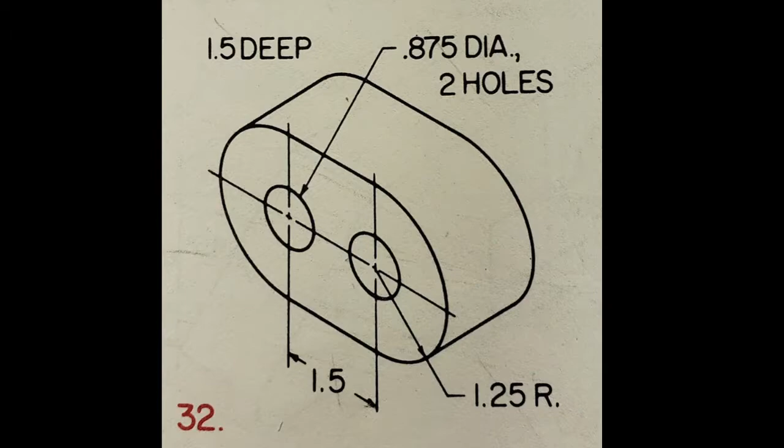Working on number 30. What are we looking at? 32? 32 it is. You guys know this one, the round one with the two circles in the side. Pretty straightforward. It's going to look a little different, three view. So we're doing three view this time. All right, let's get started.

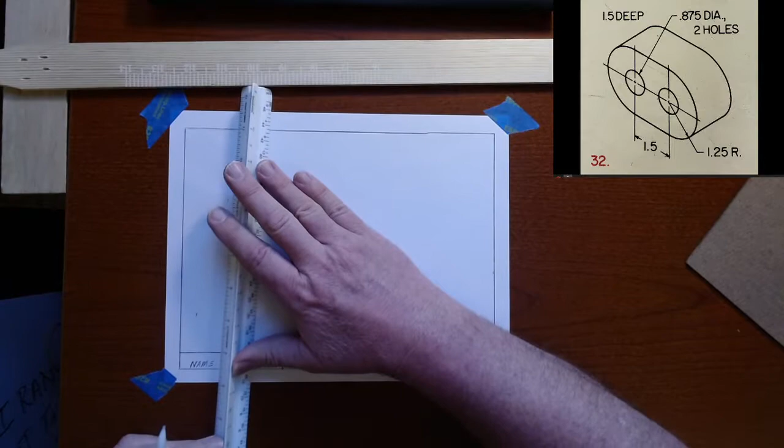As you can see, I have my border, my nameplate, my Lucky L, and we're ready to start drafting. The Lucky L is always drawn the same way. I don't have a Lucky L. Let me stick that on real quick. So I'm going to go up a half inch. Up a half inch and over a half inch. So up for my nameplate, over for my border.

And again, these are going to be super light lines because they are construction lines used to build the drawing and will probably end up getting erased. Well, a good amount of them will. So there is my Lucky L. All right, so what I need to do is I need to put those two crosses that are in the middle of the circles first.

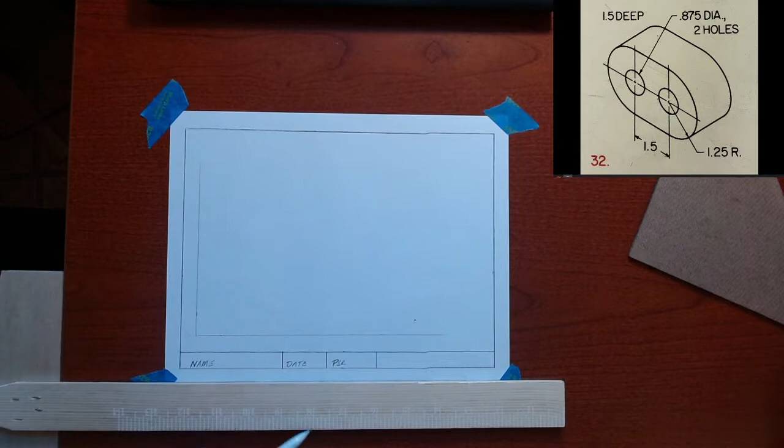And I know that they are 1 1/4 over and 1 1/2 over. And I know that from when I drew this 3D. I stared at this a long time to figure out those measurements. So I have two vertical lines. Those are the uprights in the cross.

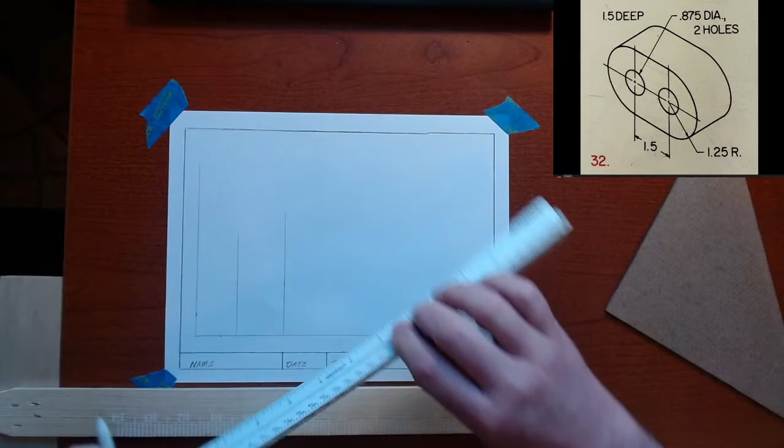And then I need to come from the bottom because it says it has a 1 1/4 radius. We're going to come up 1 1/4, put a little mark. And that's going to draw us the horizontal line there that is going to do the other part of the cross.

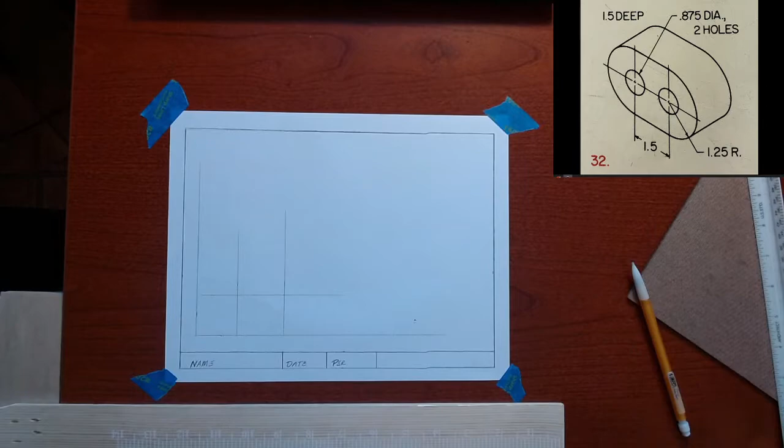So what I'm doing right now is I'm digging out my circle template. I know you don't have one. Use your compass. And again, don't use the scale that's on the compass. Those are never accurate. They never work. So what I do is I take my scale and put the stabby part at 0, and then just adjust it to 1 1/4 using my scale. That's one way to do it.

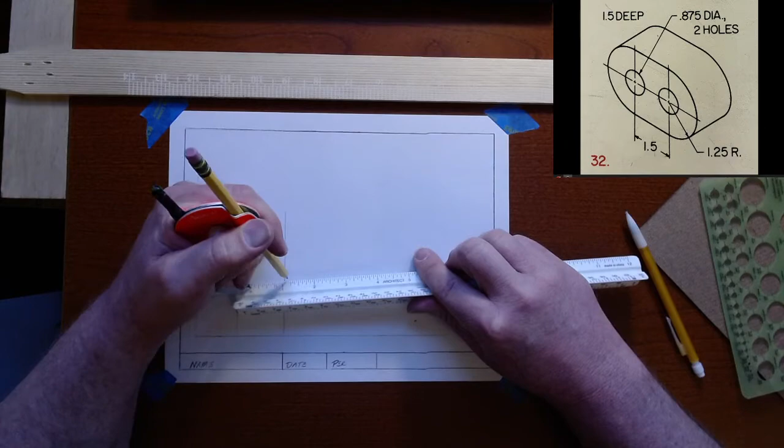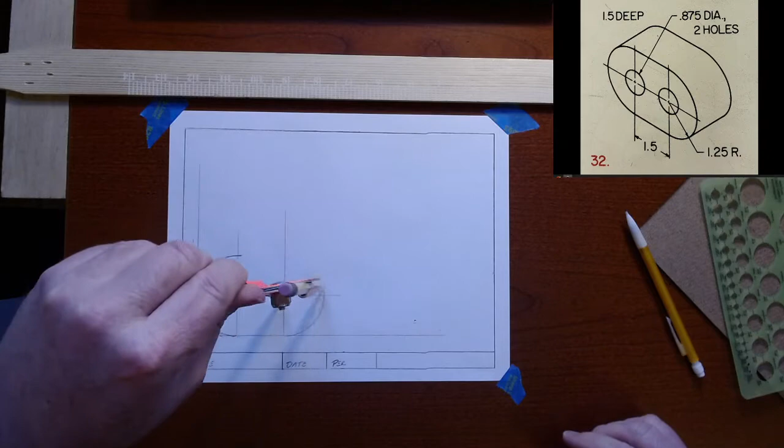The other thing I can do is I can simply take my compass and put the stabby part on the first cross and make sure when I do this that my compass touches both the bottom of the Lucky L and the left side. And again, I'm going to come in from the center of each cross. I'm going to draw those two radiuses on the end like such.

That was pretty easy. And then I'm going to come in and connect them with a line that touches the very top of those circles. A line there, and the same thing at the bottom. We're just darkening up the part of the Lucky L there, and that gives us our outside shape. I can now come in and erase this part of the Lucky L down here because we don't need it, right? That's not needed anymore.

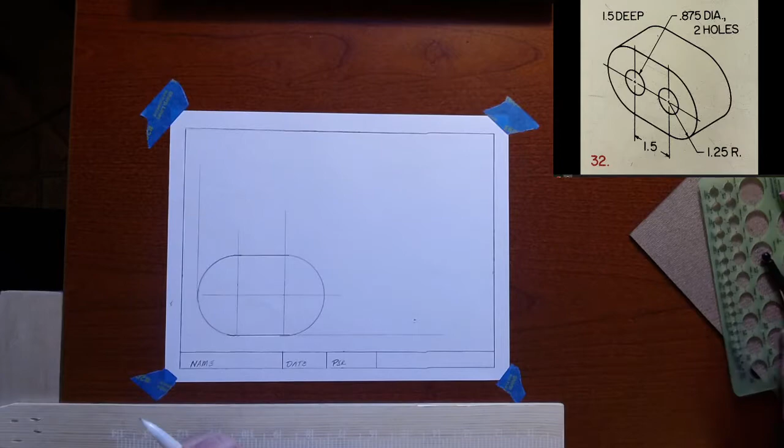Second thing we're going to do is we're going to throw a couple circles in. Again, you could use a compass and set it to 0.875, which is 7/8. And so if you're going to use a compass, half of 7/8 is 7/16. So you can take a compass, set it to 7/16 to make those circles, or you can cheat like I'm doing and you can use a circle template.

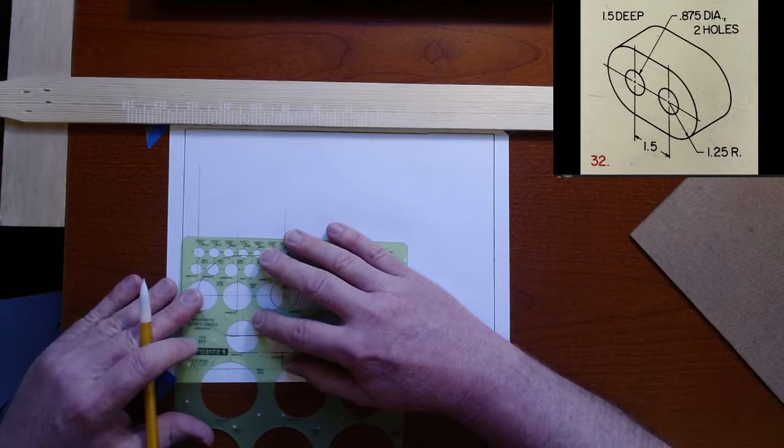I just happen to have one here, and so to make the video a little quicker, I'm going to use it. Either one is perfectly acceptable. The circle template is easier because you're just tracing, and number two, you don't have to adjust it, and they usually work out pretty well. So hey, there's my front view. Done, finished, complete.

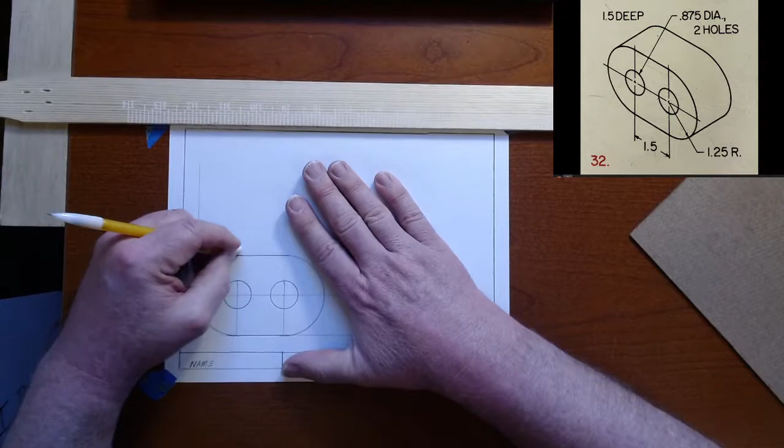I'm going to go ahead and erase these crosses that are in here. Don't need to be there. So I can erase them. I tend to leave the cross inside the circle. And the reason I do that is so people can kind of figure out how to draw this or how to make this. So if somebody was going to build this out of wood or metal or plastic or something like that, it would be nice to know the whole thing is referenced off those center crosses.

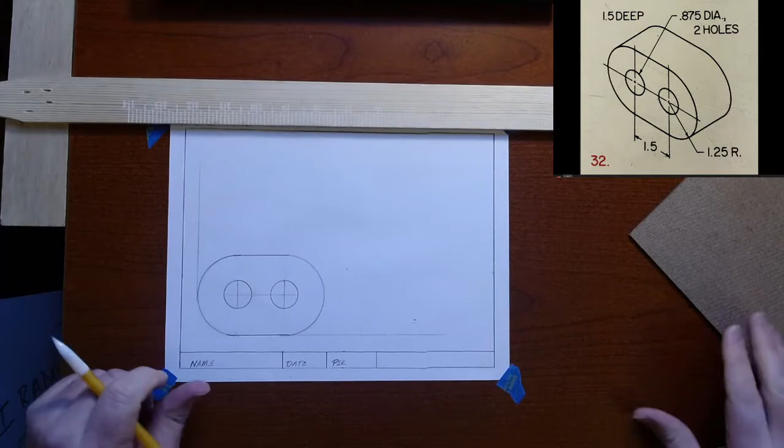So if you leave them there, it gives them that hint. It gives them that little piece of information. Okay. So now we're ready to start on our top view and our side view. So I'm going to come up a half inch and put a mark. And I know they're 1.5 inches thick. So now I'm going to go up another 1.5 inches.

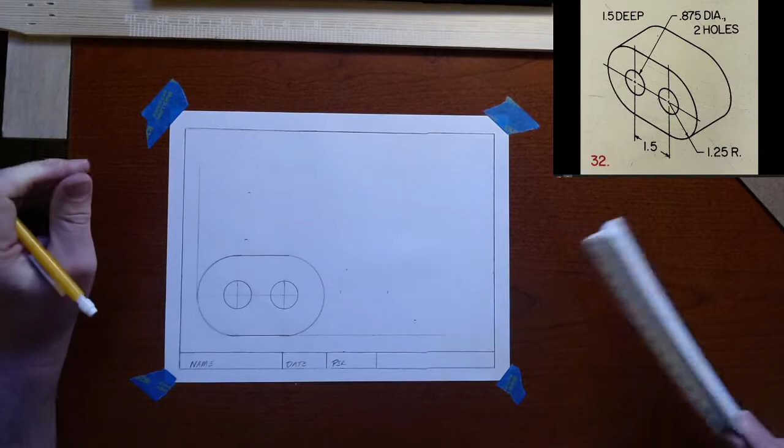Okay, so you see I got a couple dots there. I'm going to do the same thing here. I'm going to go over a half inch, and then I'm going to go back 1.5 and put a couple lines there. That is going to give me the ability to draw that line and that line, as well as this one on the side view and this one on the side view. I'm kind of doing the side and top simultaneously, so don't let that confuse you.

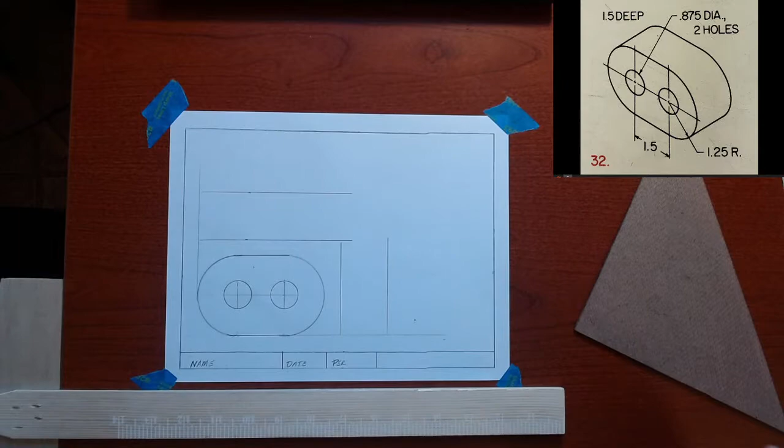I need to tell you how tall the end view is here. So if I come up here and set my triangle on the top of my front view, I can use that to measure how tall my side view is, right? So that worked out pretty well. Now you know how tall my side view is. And I'm going to come back and I'm going to erase the part of the Lucky L down here I didn't use.

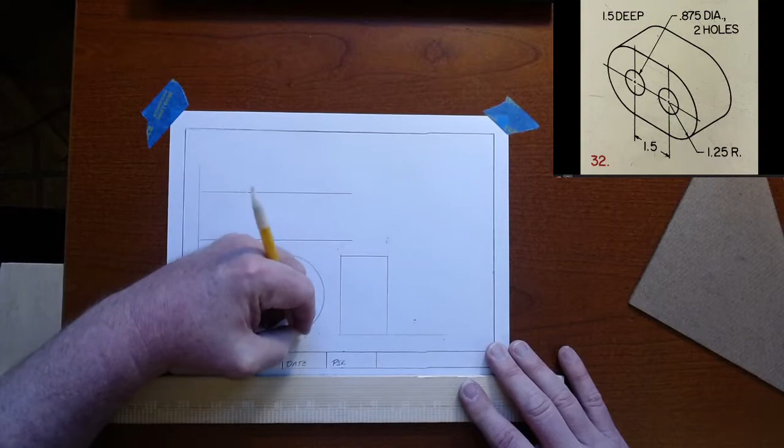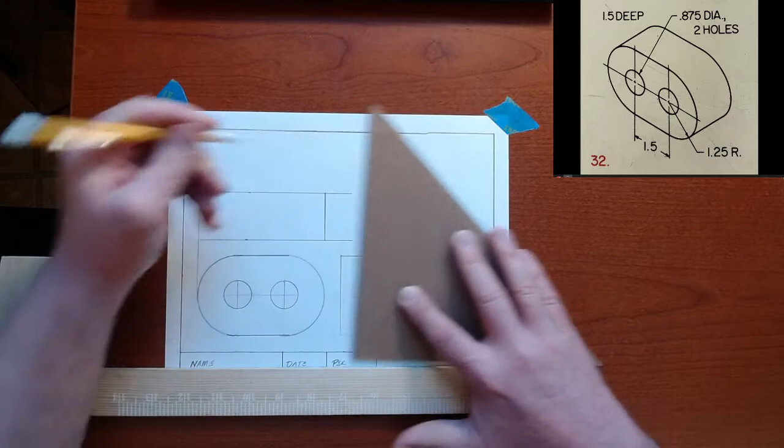Now I'm not quite finished with my side view, but this is a good time to erase that Lucky L because I don't want to forget and leave it in there, okay? Hey, let's do the top view now. I'm going to come in, and again, if I set my triangle or my pencil at the outside edge of my front view, voila, that is going to measure my top view, okay?

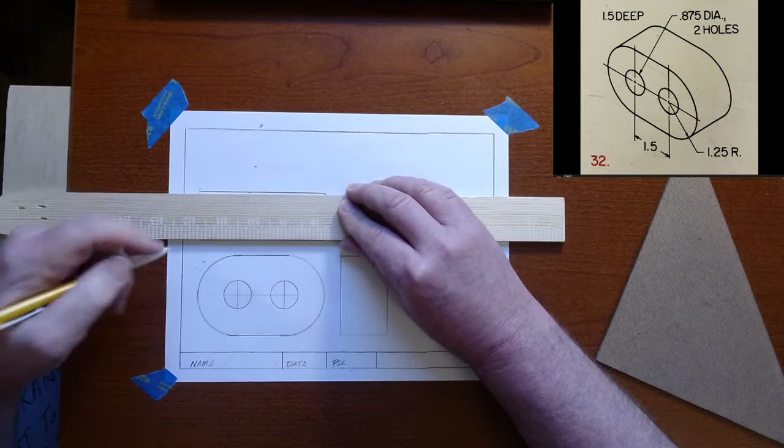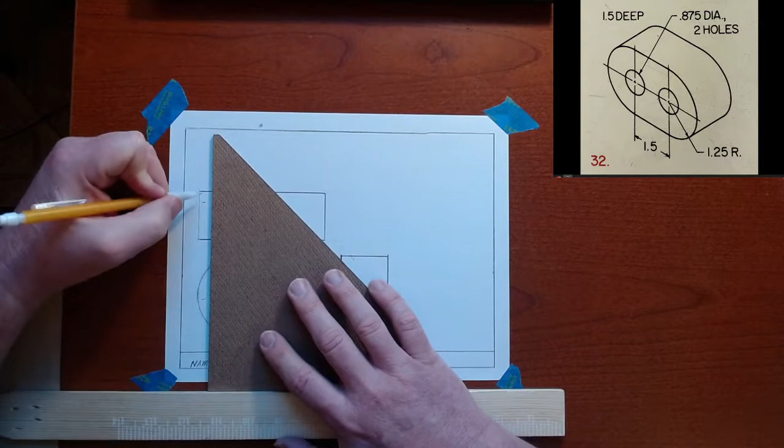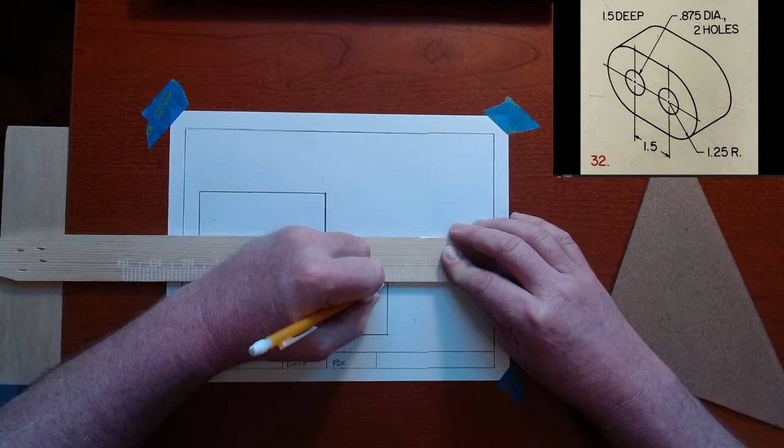And again, at this point, you guys are getting pretty good at drafting. And what you should start to notice is that we're trying to give you a complete skill set here, how to draw something that's round, something that's flat, something that's squared. So when we say, hey, draw a CO2 car, draw a shadow box, draw a napkin holder, draw a rocket, all those things are real easy for you because you have all these skills. You just have to apply them. I have kids like, oh, I'm not a big fan of drafting. But once you know how to do it, it sticks with you a long time. So be patient.

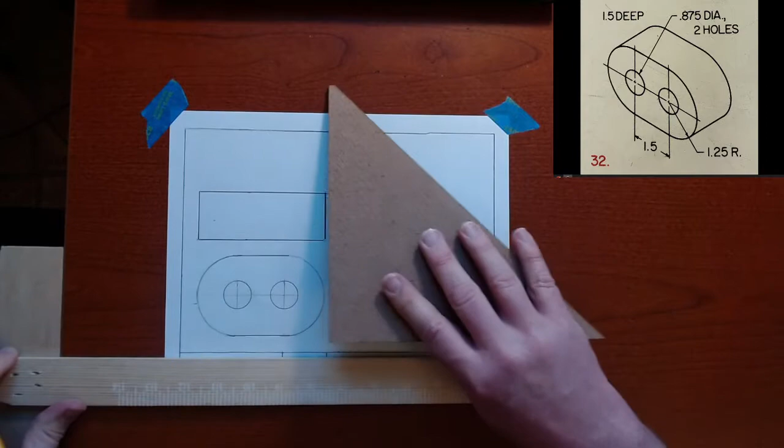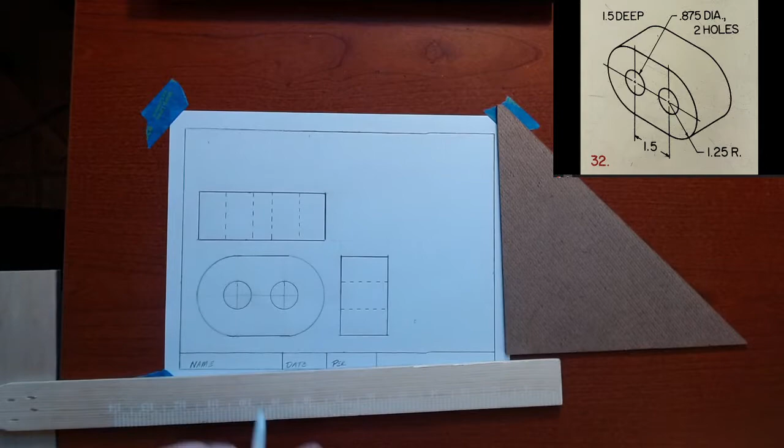What you're noticing now is I am using those circles that are in my front view to locate where the hidden lines would be showing something hiding in my top view and in my end view. Okay. And so I'm just going from my front view to my top view right now. And what those dotted lines show is something's happening there. It shows the hole going through, and this shows a hole going through. And if you want to get really fancy, this is something I do. You don't have to as a middle school kid, but I like this.

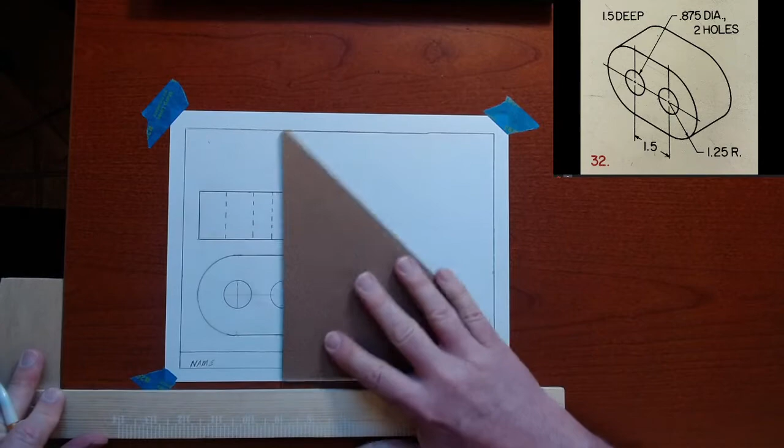What I do is I start outside, I come in, and what that line does is that shows me that that is the center of the circle. I'm going to do the same thing here. And I'm going to show you. So if people need to measure out how far those circles are, they have it, okay? So it looks a little different. Let's go a little bigger and see if that makes sense. So you can see where the center of the circles are.

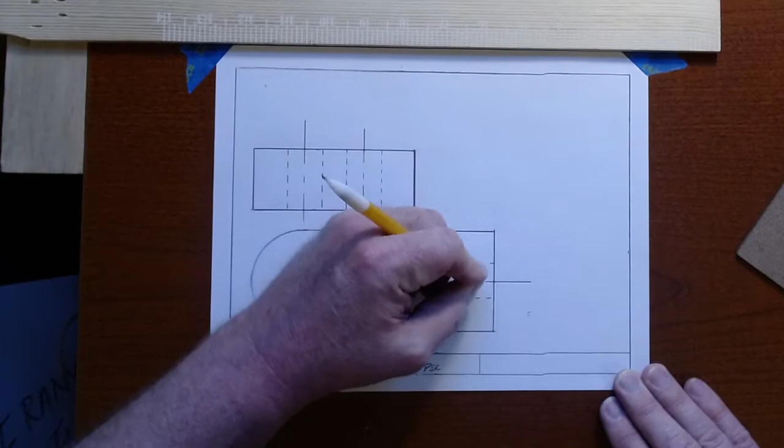I'm going to bring this one back just a little bit this way. I didn't quite get that centered, and that will drive me nuts. It's just me being crazy, but, you know, I am who I am, right?

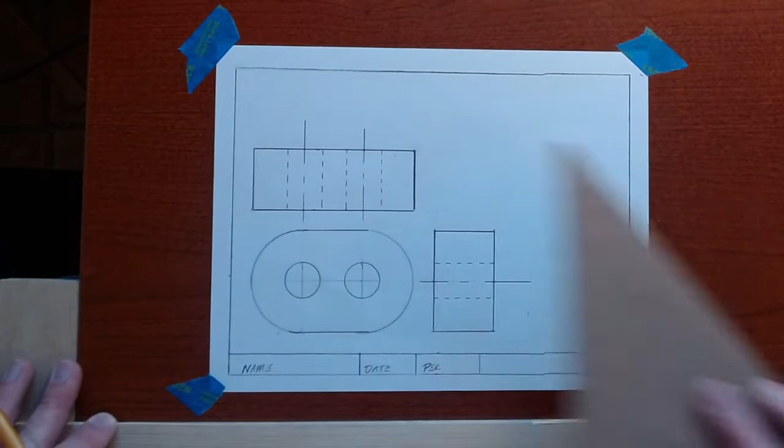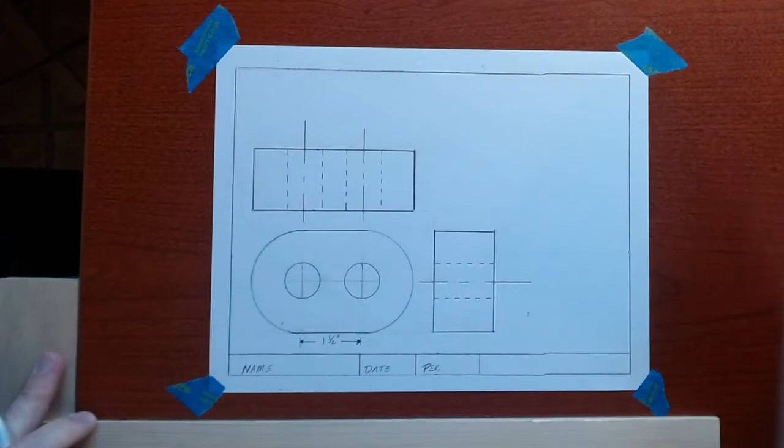Okay, so front view, top view, end view. Time to throw some measurements on here. Remember my centers here? I'm going to use those lines. No, I'm not. I'm going to come down here, and I'm going to tell you from the center here. So I'm going to put a 1/4 inch there, a 1/4 inch there, put a couple extension lines. And this is 1.5. I'm going to use an arrowhead here, an arrowhead here. And then I'm going to tell you that this is from here to here.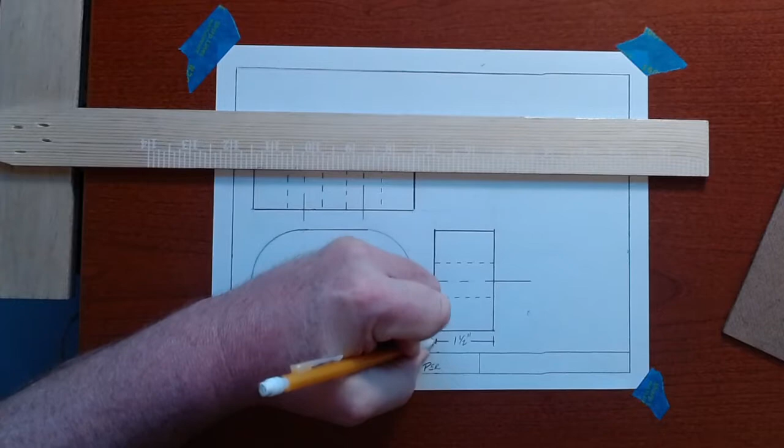And I could have done this on the top. Either one would have been perfectly acceptable. I'm going to come in and say from here to here is 1.5. And remember, you don't want to put duplicate measurements on. Putting duplicate measurements on is just as bad as not putting enough measurements on, okay? In drafting world, they frown on that. All right. So I'm telling you how wide the whole thing is. So that tells me how wide that is and how wide that is. I've told you the distance between those circles.

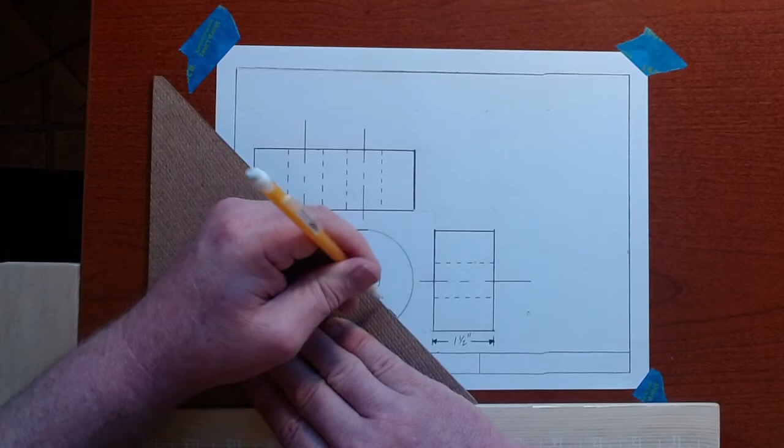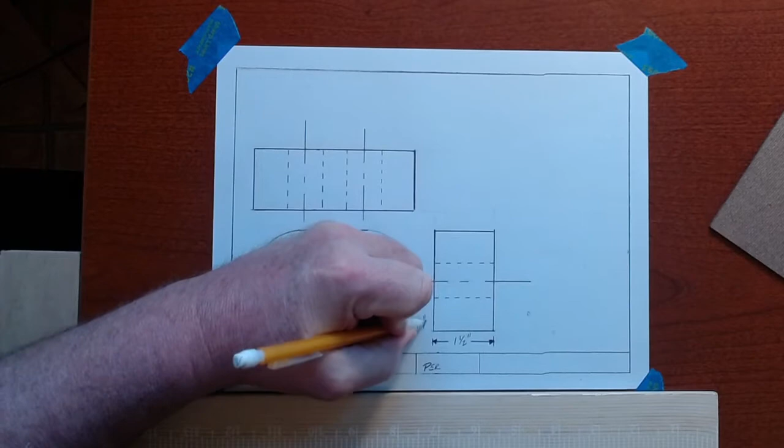If I come in and give you, from the center of the circle to there, I could put the radius right inside here if I want, or I could kick it out like they did there. I think I'm going to kick it outside like they did because I think it'll look better. So all I do is go there, and I'm going to say 1 1/4 inches, and I need to tell you that that's radius, and that's a little crowded. I should have scooted it over a little bit. I still can. I can move it around if need be.

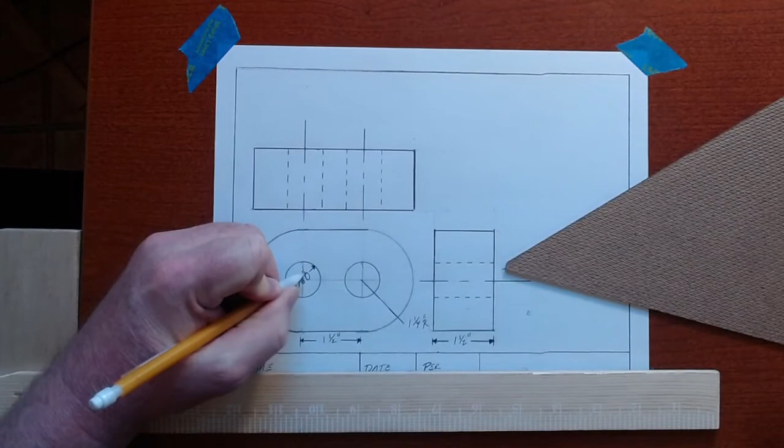What else do I need? Oh, I need to tell you the size of those circles. And again, I'm going to cheat a little bit here. I'm going to go here and here, and all I've done is put 2 little marks that have arrowheads. And again, you can do this a bunch of different ways, as long as it notes that circle is 7/8 inch diameter. And so for diameter, I'm putting a circle with a line through it, which tells us that we're talking about diameter. And I think that will get us what we need, okay? So we have the 4 measurements that we need to have. I think that looks pretty good.

Hey, I hope this helped you draw number 32, 3 view.